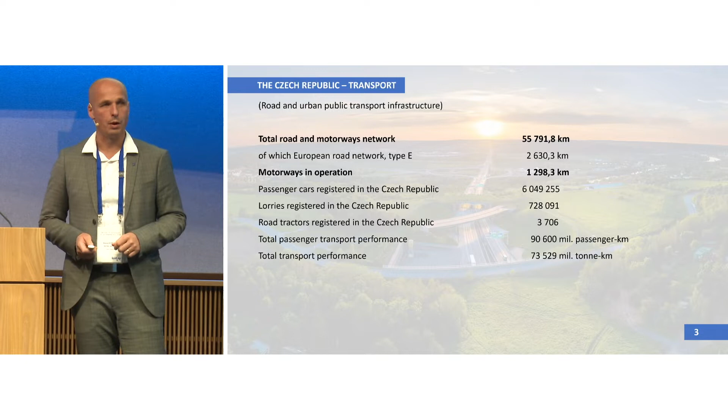So at the beginning, some basic data. We are a small country in the heart of Europe with a population of about 10.5 million inhabitants, and currently we hold the presidency of the Council of the European Union. Something about transport: there are about 56,000 kilometers of roads and motorways, and about 1.3 thousand kilometers of motorways in operation. Prague, the capital of the Czech Republic, has about 1.3 million inhabitants, and it's a famous historical city - I'm sure some of you have visited it in the past.

Something about transport: there are 4,000 kilometers of roads, 32 bridges over the river, and 11 tunnels. What is very important is the division of transport work, where about 37% is made up by public transport. It is very, very important.

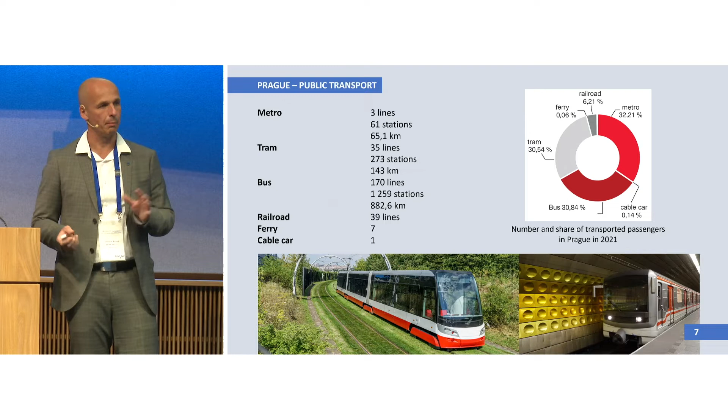Here we can see short information about transport. We have 3 metro lines, 35 tram lines, and 170 bus lines. On the right, we can see the division of transported passengers in Prague last year, and you can see that metro, tram, and bus each have approximately one third. So this is just basic information about public transport.

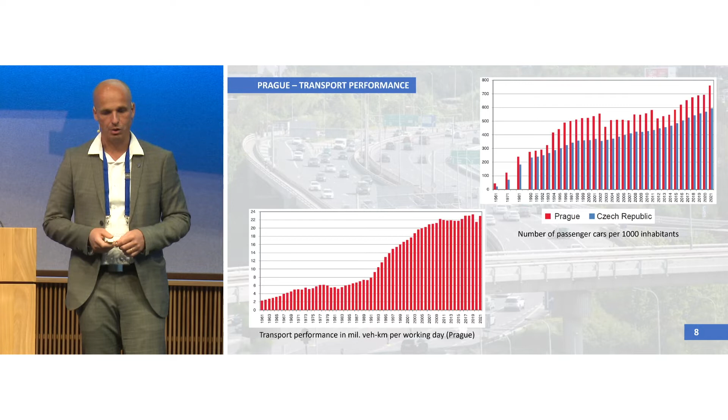On the left, we can see transport performance in million vehicle kilometers. This graph is interesting, especially because you can see the change or growth in 1989 when the political system changed, and you can see the growth of transport performance after that. On the right, you can see the number of passenger car owners per 1,000 inhabitants - as you can see, almost everybody owns a car on average.

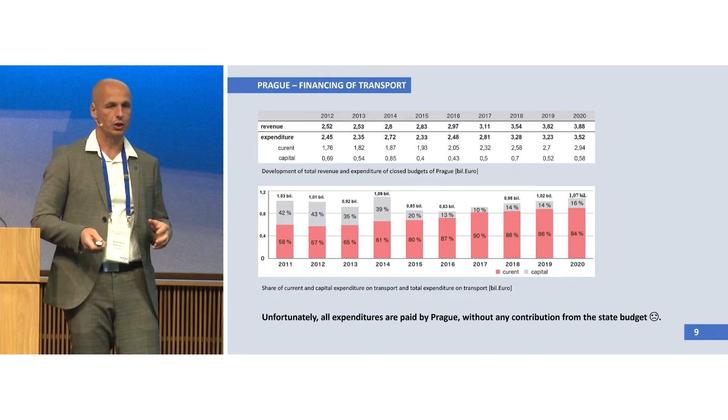Here is short information about financing of transport. First, we can see revenues and expenditures for Prague during recent years, which are something less than 4 billion euro. The table below shows expenditures on transport, about 1 billion euro per year. What is very bad is that unfortunately all expenditures are paid by Prague without any contribution from the state budget. It's really bad. All politicians are talking about it, and I hope it will change, because 1 billion euro is too much money.

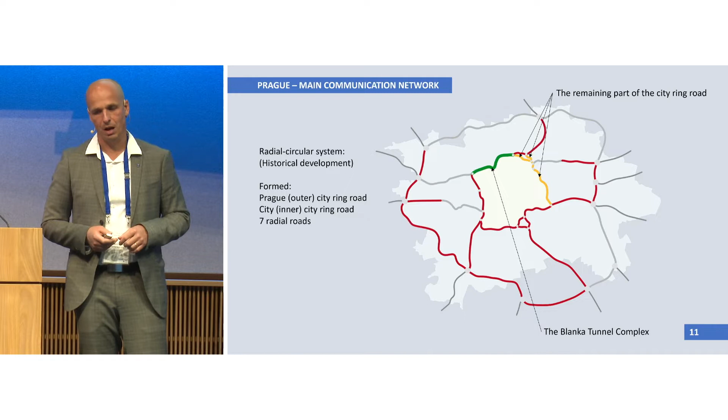Now about the main communication network. It is formed by 2 rings, inner and outer, and 7 radial roads. Red color represents parts which are in operation now. I would like to talk about the following 2 constructions: the Blanka Tunnel complex and the remaining part of the city ring road.

The Blanka Tunnel complex has a total length of about 12.6 kilometers, and it contains about 11 kilometers of tunnels within the town - about 87% of the total length. It was constructed from 2007 to 2015, and the total cost was 1.7 billion euro.

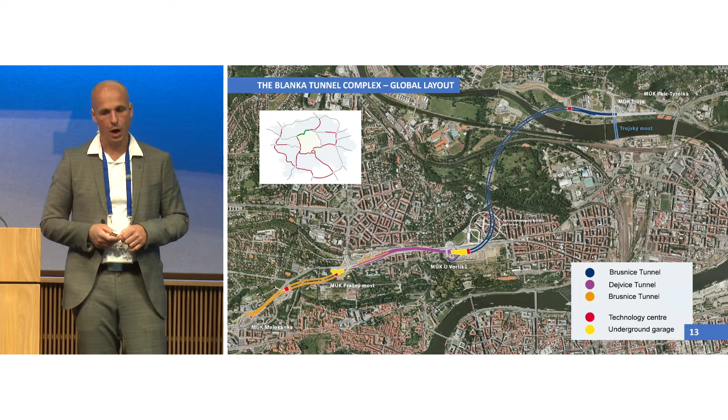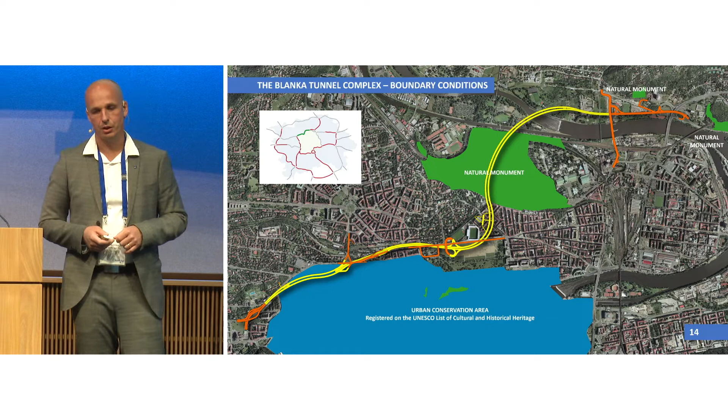This project serves 100,000 vehicles per day. The whole project is divided into 3 tunnels, and contains 4 technological centers and 2 underground garages. It underpasses an urban conservation area registered on the UNESCO list, a natural monument, and the Vltava river.

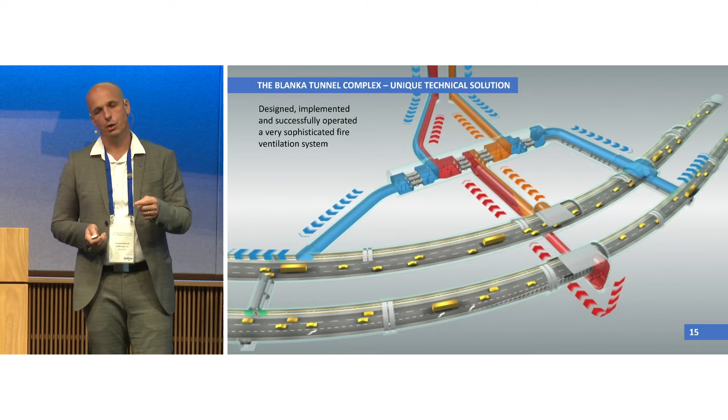It means that in case of fire, the smoke is sucked into the corridor, to the ventilation room, and outside of the tunnel. In this video, you can see very clearly how it works, because this is the smoke detection test.

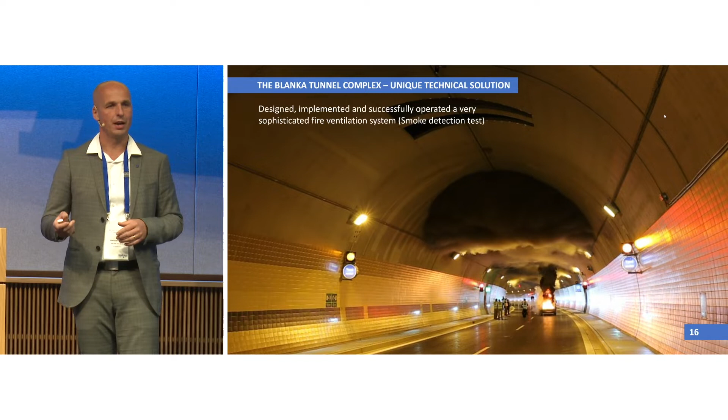It's most useful to try it out exactly like this. Now you can see how the ventilation is working, how the opening is able to suck the smoke out, allowing people to escape in case of fire and so on. So it's very, very useful.

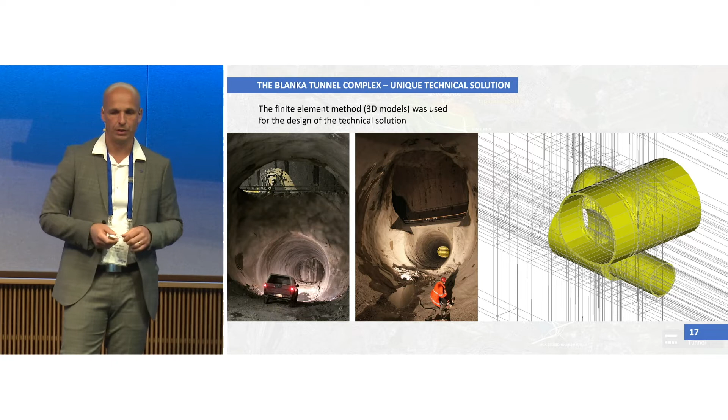Of course, it is a very complicated construction. Some parts are very complicated geometrically, and it was necessary to use the finite element method in 3D models for this project. The excavated ventilation machinery room is one of the largest underground works in the Czech Republic. It has 20 meters in diameter and about 300 square meters cross section. Compare the picture on the right to a building which has about 5 floors.

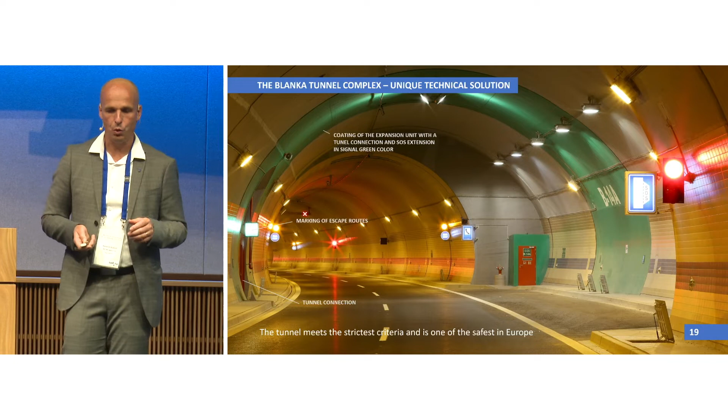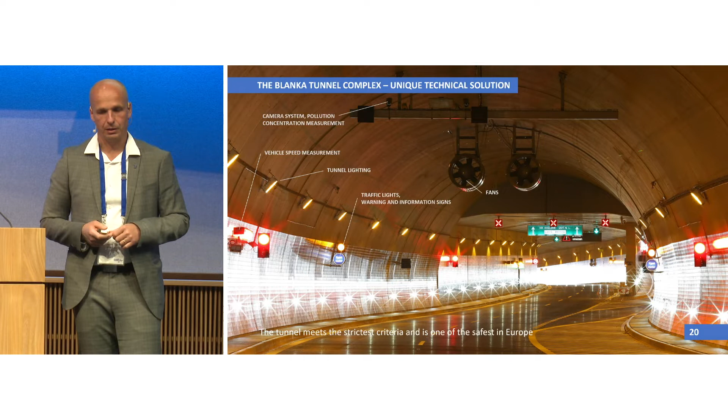The Blanka tunnel is really well equipped, as we can see from the safety point of view, according to the standards. It's not necessary to explain everything, but from a technological point of view, it contains tunnel lighting, camera system. This system allows automatic detection of smoke, slow cars, passengers or people on the road, and so on, and of course pollution concentration measurement. Vehicle speed measurement is really necessary, because keeping maximum speed is necessary in the tunnel. Fans, warning and information signs, emergency lighting of pavements, variable information boards and road markings, and linear fire detection.

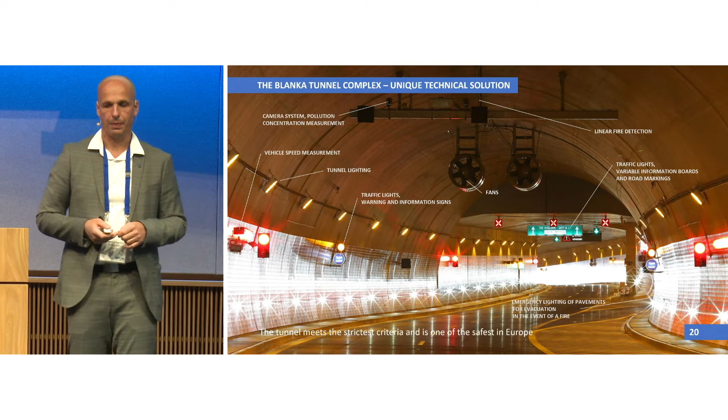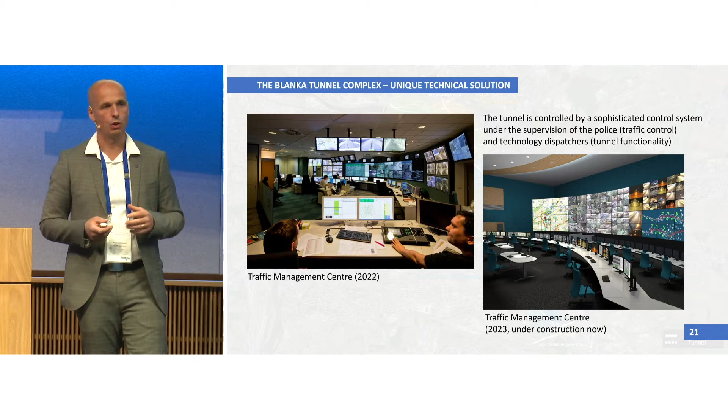This tunnel is controlled by a sophisticated control system under the supervision of police and a technology dispatcher. In the picture we can see the traffic management center as it looks now, and here we can see the new one, which is under construction now and will be put into operation in 2023. I think this is the first similarity to underground repository construction, which is fully equipped with technology and controlled by a sophisticated control system.

It's very complicated to build a construction in an urban area. The construction is a short-time nuisance for local people living around it. For this reason, a special information center, a visitor center, and a special website were established. I think this is the second similarity, and it is necessary to very intensively communicate about the construction to the people. In my opinion it's very important, and for this reason this information center and website were established.

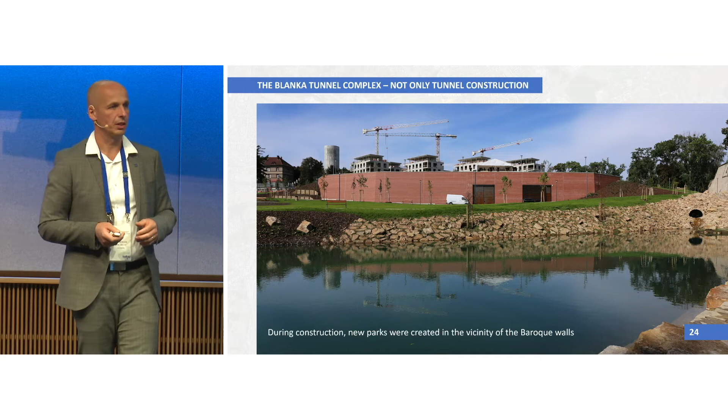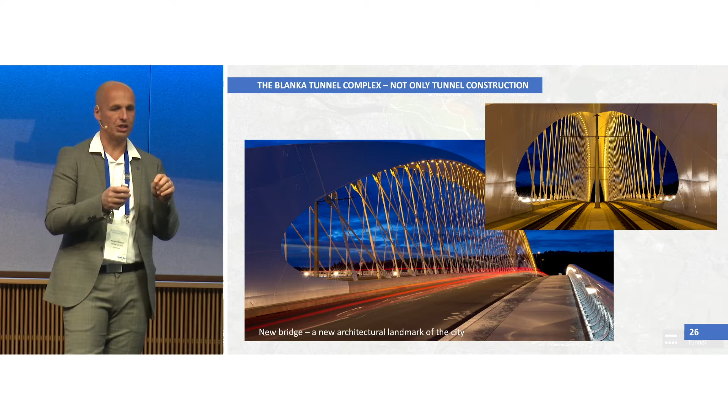The Blanka tunnel is not only a tunnel for vehicles, it's a new park, new tram stops, reconstruction of tramways, and a new bridge, which in my opinion is a new architectural landmark of the city, especially at night, as you can see in these pictures. This is another similarity, because the construction is not just about this project, but about benefits for the people who live around it and are interested in it. So it's necessary to create benefits, not only focus on, for example in this case, a road for vehicles.

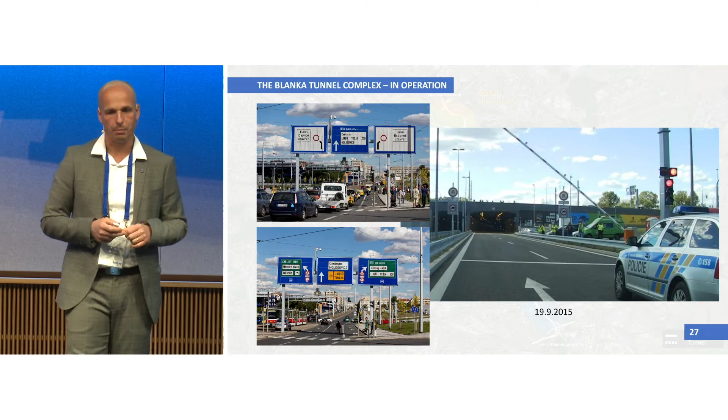Yesterday it was 7 years since the tunnel was put into operation, and in my opinion it was a really big day for people living in Prague.

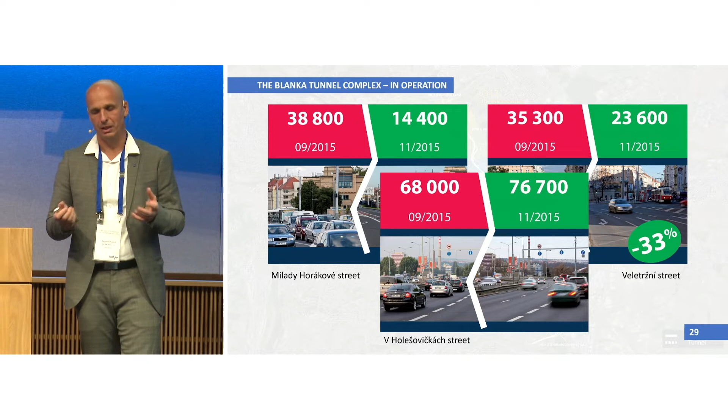What impacts did we have? It's completely clear in this picture, because it is the same street before the tunnel and after the tunnel. It means we rapidly decreased the amount of cars on the surface. And of course not everywhere - there are some places where it is not so good, especially at the end of the Blanka tunnel complex, where the remaining part of the city ring is missing. So it is a complication, but we are trying to do it as well as possible.

We very carefully monitor traffic and environmental impacts of the project, and publish details on the website, in the metro, and on billboards. This is again similar to the underground repository case. It's necessary to create positive public perception, which is very important in our case for the further continuation of construction of the City Ring Road. It's necessary to give positive information from the existing project to the people, to inform them about it, because it's easier to plan and discuss new construction that way.

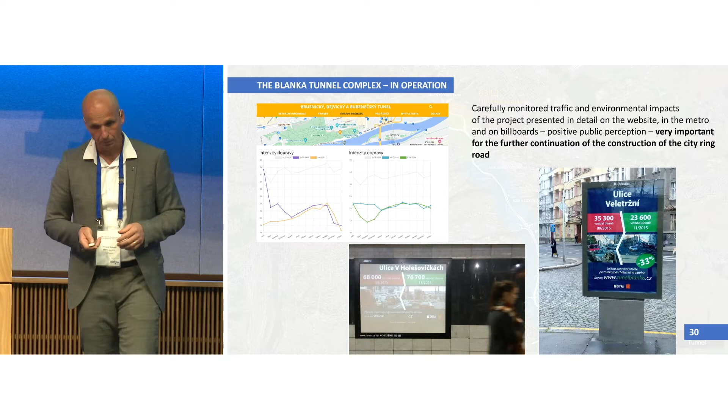I think this is another similarity. Just a few sentences about the cost. As I mentioned, the total cost was 1.7 billion euros, about 30% higher than expected at the beginning. What were the reasons?

First, it was unexpected geological conditions, about 17% of the 30%. It's the same as in the underground repository case, but not exactly, because here the tunnel underpasses really bad and complicated geological conditions, while for the underground repository we designed for the best rock conditions possible. So the problem could be there as well. About 5 or 7 percent, I don't know exactly, was due to new client requirements.

After the contract, the client decided to do a larger scale of reconstruction of roads, parks, and so on, which of course increased the price. The other reasons were adjustments or new technical standards which the client decided to use. As I mentioned, the construction started in 2007 and finished in 2015.

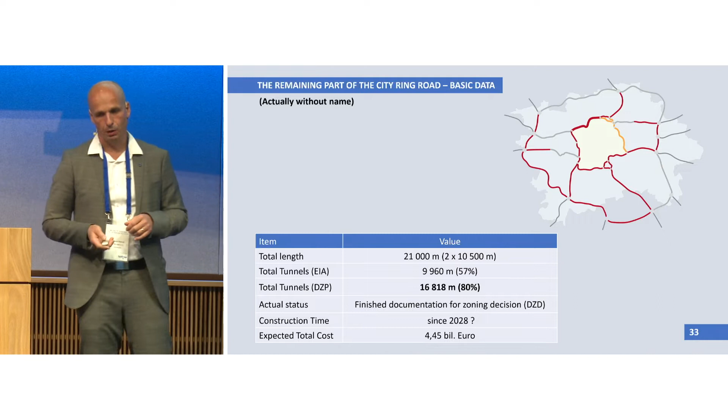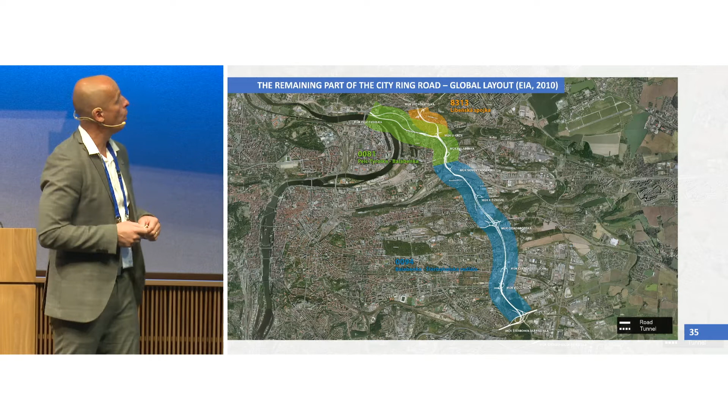Now I would like to talk about societally acceptable urban design and minimization of environmental impacts. Here we can see the global layout from EIA documentation, where the dotted line represents tunnels and the full line represents above ground roads. The other global layout is a little different, from documentation for the zoning decision. With the yellow color you can see tunnels, so it is 80% - almost entirely in tunnels except for this part at the end, where there are no buildings located, and there an above ground road is designed.

Now we will see some visual comparisons between how it looks now, how it was designed in EIA documentation in 2010, and what is the final technical solution in documentation for the zoning decision.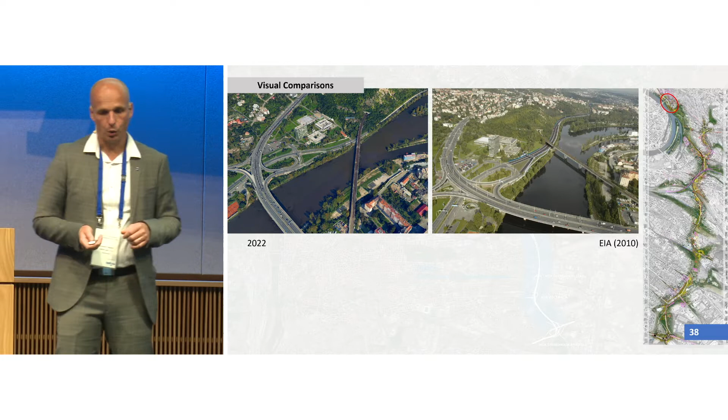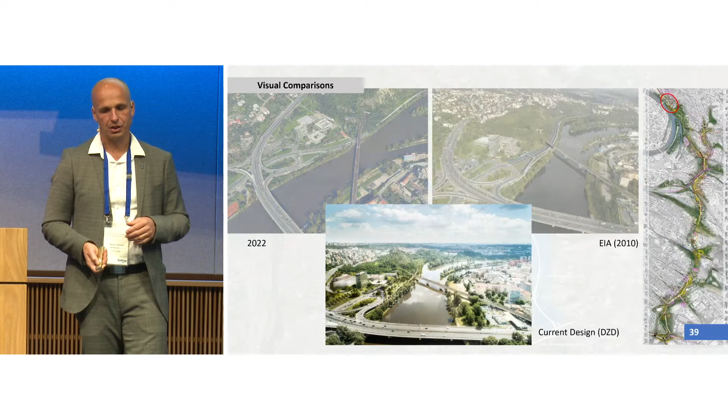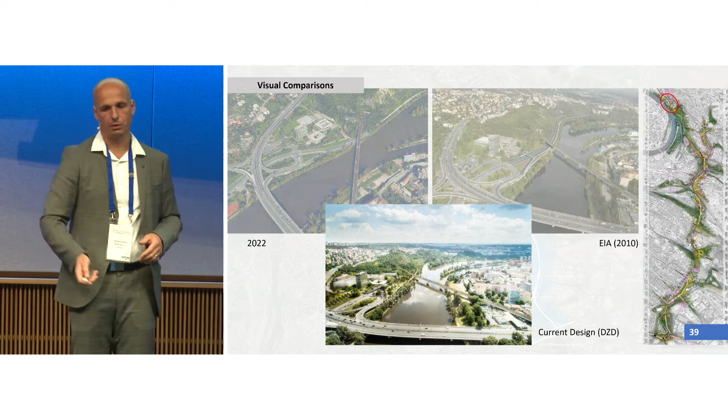In this case you can see how it looks now, and this technical solution of the city circle - an above ground road which follows the river here. In actuality it has been completely changed - you can see the portal of the tunnel, and the city ring road is underground for the whole length here, while this road on the surface is the same as the existing road, just for pedestrians, cyclists, and so on. It's very nice to walk around the river. I forgot to say that on the right you can see the place where the visualization is located.

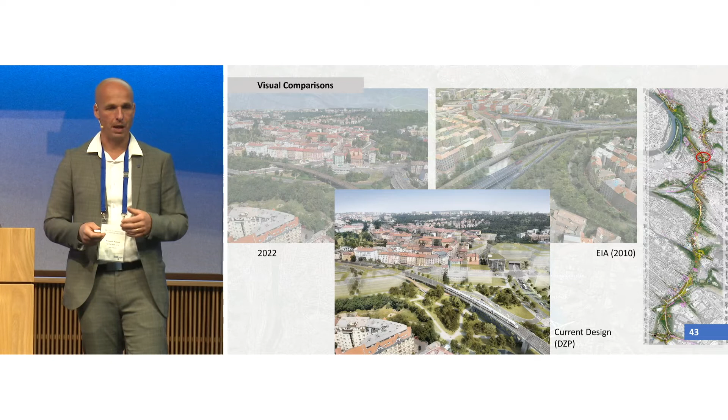Another example, again how it looks now in 2022, and what was the solution from EIA - you can see again the city circle as an above ground road between buildings. The new solution now is here: there is a city ring road, but underground, with nothing above ground, just tunnels, which will allow, for example, building up this area with new buildings, or planting new trees and greenery generally.

Another example from the other side, again how it looks now, and what was the solution of EIA - you can see again the city ring road as an above ground road here. The technical design from DZD shows the city ring road as a tunnel, and here we can see just roads for local transport with low intensity of traffic.

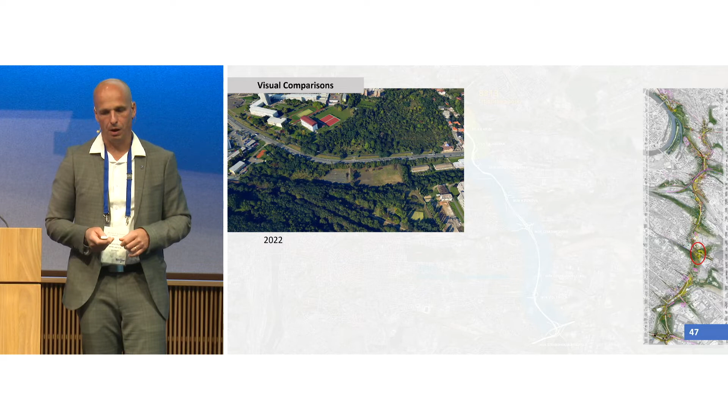Next visualization is from this part of the project. Again, how it looks now, the previous technical solution from EIA, and the new technical design from DZD. As you can see, there are fewer roads on the surface and more greenery.

The last example of visual comparisons is from the end of the project. You can see there are not so many changes here because this area is not full of buildings, and generally there are no new buildings planned here, so this part remains above ground.

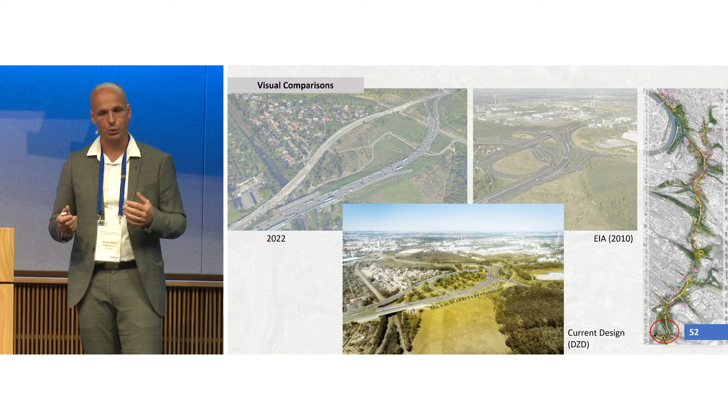From these previous slides, I would like to show you that it's necessary to design construction very carefully to minimize environmental impacts, and again to try to put construction under the surface. It is the same, in my opinion, as with an underground repository - it's clear the repository itself is underground, but the part at the surface is like a factory. It's necessary to think about it, offer some benefits, and try, in my opinion, to hide it underground as much as possible.

It's the risk of accident, and it's necessary to minimize it. So it is very, very useful to use a GPS signal.

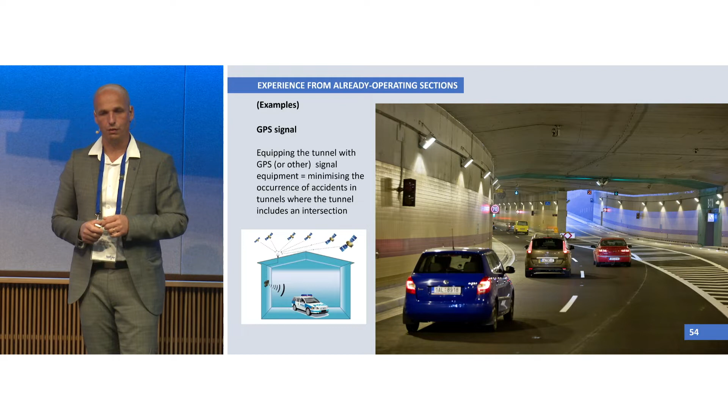Again, I have to say that I am talking about tunnels with intersections. A tunnel from A to B without any crossings and possibility to get out is quite a different case.

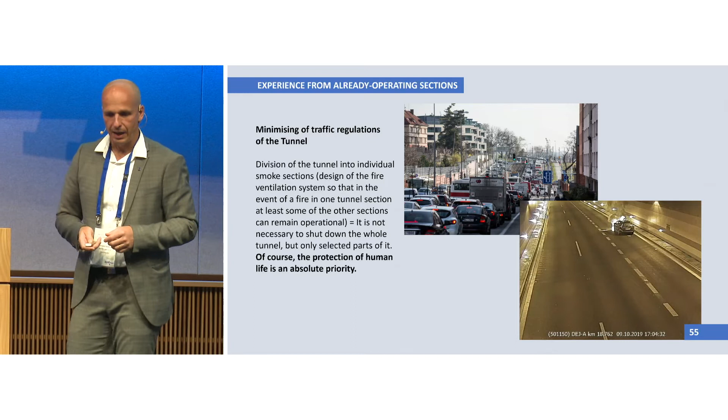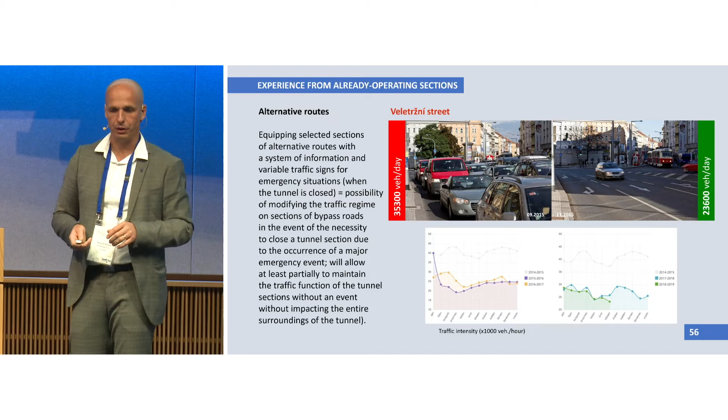Another example that I think is important: it's necessary to think about alternative roads. This is connected to my previous slide. If I open the tunnel and rapidly decrease the amount of cars on the surface, I can change it. I can plant new trees, make new parks or cycle lanes, and completely change it, because there is a really small amount of traffic. But in a case of fire or an accident, when I have to close the tunnel...

All cars have to use the surface road. But in this case, the previous or former road on the surface is missing, so it is terrible. And the solution is, for example, to use or create bus lanes and to use variable road signs.

When the tunnel is operated, the lane is just for buses. Then in the moment when I need to close the tunnel, I can change the road sign, and the lane becomes able to be used by all cars. So it's necessary to think about it.

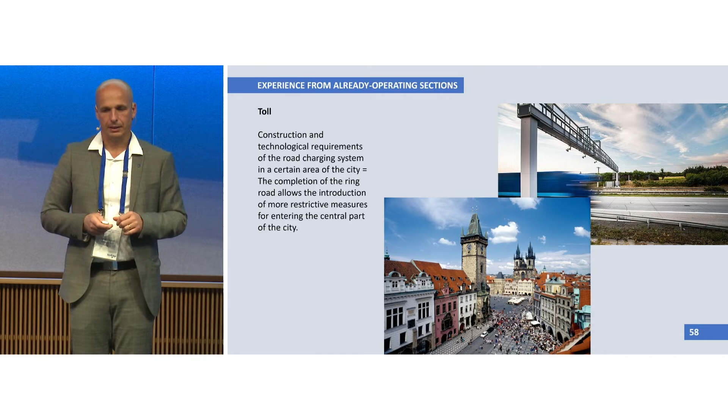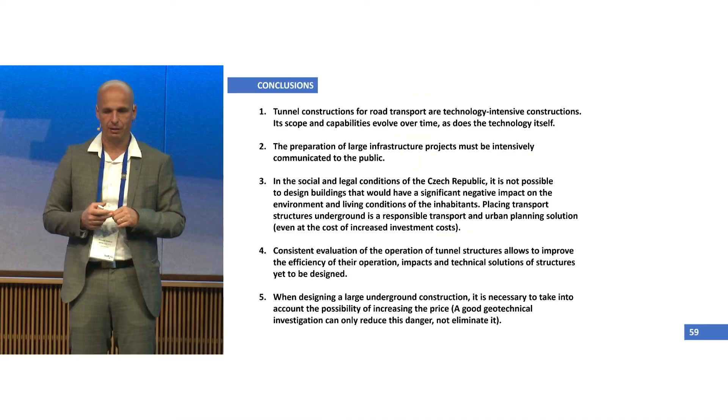Now we are at the end of my presentation. I will not read it exactly, but I think I found some intersections where you can have some shared problems, like in underground repository. Some of them are that it's necessary to communicate, to be aware of money, and to look for the right system of contract, which is very, very important. That's all, thank you for your attention.

The outline of the presentation has 4 parts. I'm going to describe the context, then describe the approach to optimization on decommissioning end states. Then I'm going to provide a worked example at Traws - we shorten it because the pronunciation is difficult, we generally just say Traws when talking about it. Finally, I'll give some conclusions and try to summarize the relevance to geological disposal optimization.

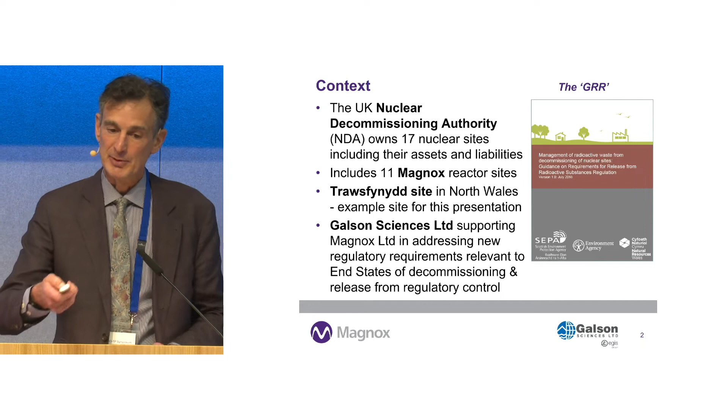And what's the rationale for this? Well, basically it comes from a consideration of the detriments associated with off-site disposal, off-site transport and disposal.

When you think about it, there are safety issues, both increased detriments to worker safety, both radiological and non-radiological. There's large environmental nuisances, a larger carbon footprint. There's cost, both of the decommissioning operations, but also the off-site disposal costs.

And certainly in the UK, and probably not only in the UK, engineered disposal at national sites is a scarce resource and needs to be properly managed. If we can find other solutions, then it behooves us to think about them. So there's a range of detriments that need to be thought about, and long-term radiological safety is not the only issue in this decision, but of course it is an important issue.

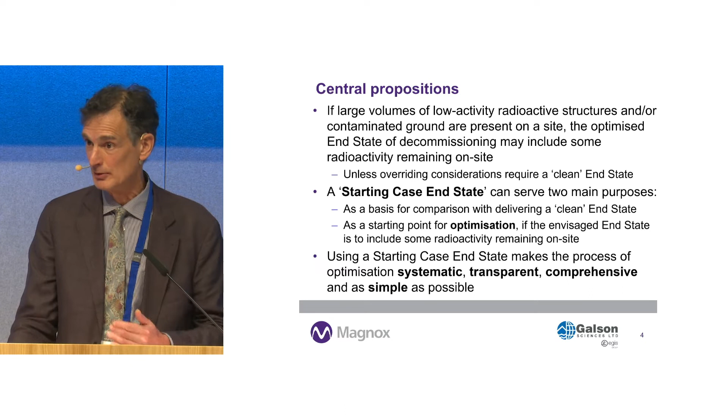So those are positive. Those are the attributes we're looking for as a starting point.

The way this has been defined by MAGNOX is, first of all, what can we do to minimize off-site transport of materials? And by minimizing that, what they're actually looking at is minimizing the quantity, not the activity, because clearly all of the higher activity materials will need to be taken off-site. So this is very much focused on low activity, high volume wastes.

And what might the credible candidates be for leaving structures or materials on site at the final end state of a decommissioning program?

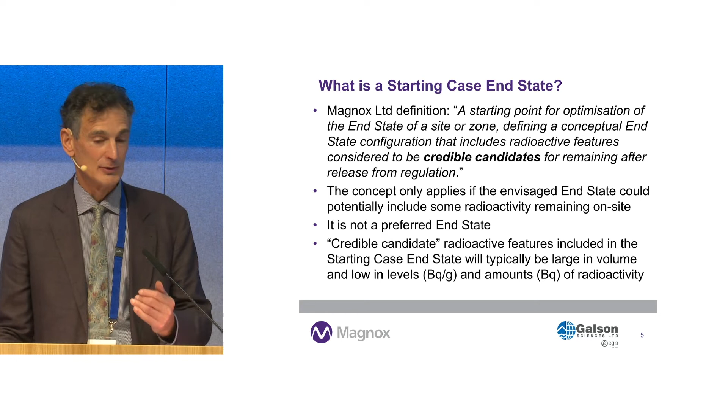So the starting case end state is, of course, not the preferred end state. It's only a starting point for optimization discussions. So that's an important aspect.

And along with that is the concept of iteration. It won't be a one-pass process. It will be repeated as the program advances, and this is foreseen in the regulatory guidance as well, because there are actually two requirements pertaining to optimization in it.

First of all, there's the decision of whether or not it even makes sense, whether it's an optimized solution to leave any material on site at the final end state. Certainly radiological assessments are part of that decision. They will inform the decision, but they're not likely to be the determining factor because of the other issues I mentioned, the other detriments associated with off-site solutions.

So that's one thing. And the approach to doing this is to come up with an end state that essentially has no mitigations in it, and then to examine potential ways to improve that end state through mitigation.

This is the second part of the staged or graded approach in the regulation, that once you've reached a decision that yes, some material could be left in principle on site, the next step is, what's the best way to do it? How do we optimize that solution?

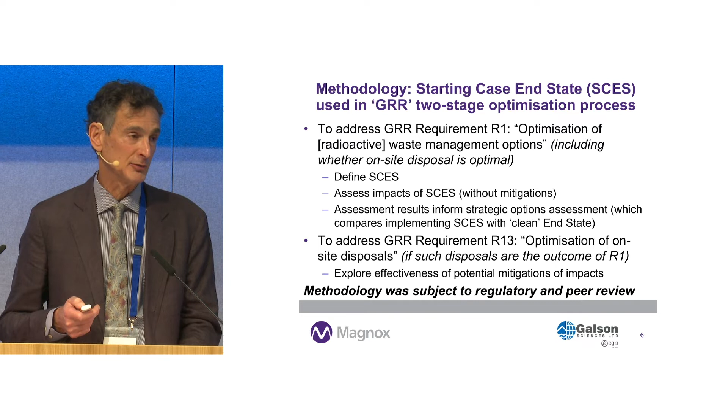So I would call this a graded approach to optimization, whereby you make a decision first on the higher level question. You define that as simply as you can, and then you might have a lot more detail that comes into the lower level decisions, and they might need a lot less stakeholder input as well at that point, once the primary decision is made.

This methodology was subject to dialogue with regulators and also peer reviewers.

And it's kind of well internalized and being rolled out now across Magnox sites. The site that is at the front end of this, and I'm going to talk about this now, is the Trawsfynydd site in Wales. The site had up until now been the lead site for applying this approach, because it's in a national park, so it's in a scenically important area. It was one of the sites that's been prioritized.

The original option, as for other sites, was to have an end state around 2080 with no remaining radioactivity on site, so a clean end state. Now the approach being implemented is to look at the high volume, low activity features that might be left behind, and the structures that are most important to think about.

The typical structures are reactor bioshields and cooling pond structures. These cooling ponds are essentially where spent fuel was cooled prior to sending off to the Sellafield site for reprocessing. And indeed, on this site and other sites, there are areas of contaminated land that need to be considered.

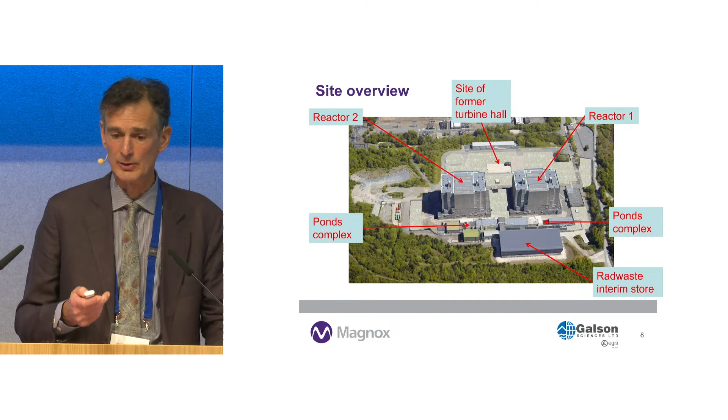This is broadly, I'm sorry for not having a better picture, John, but this is broadly what the site looks like today. There are two reactor blocks, and you can see the ponds complex in front of them. It has a pretty large extent actually, it's a large structure in its own right. The turbine hall is now long ago demolished, and there's an interim store on the site for intermediate level waste. The spent fuel's all gone at this point because the reactor shut down quite a long time ago.

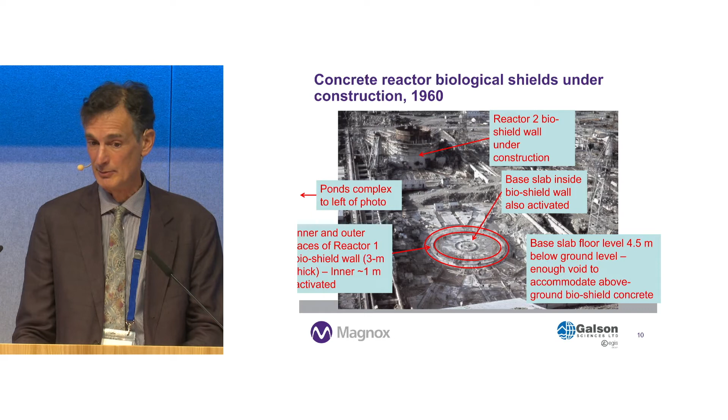So in order to define the starting case end state in terms of inventory at Trawsfynydd, first of all, obviously a number of kinds of wastes could immediately be excluded. The reactor core graphite is still on the site, that doesn't fall within the scope of this study, that has to be disposed of in another way. There's also some non-radiological hazardous components, asbestos in particular, quite large quantities that wouldn't be candidates, and readily removable metallic components wouldn't be candidates.

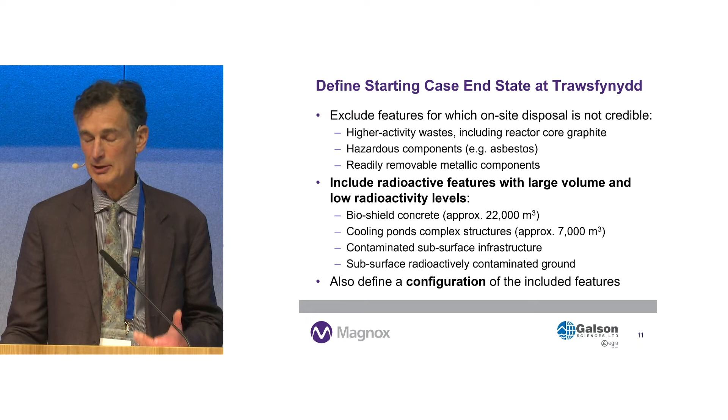So the focus very much is on the large volume, low activity structures and the contaminated subsurface ground. So the one thing is to define the actual structures under consideration, and the second thing is to define a geometry that needs to be thought about.

And so the first assessment is just looking at it like that. The above ground material is collapsed into the void space, and there's 1 meter of clean cover, and that's it. So if that's the first test, is that good enough just to leave it like that?

So the starting point is an end state defined like that, with no substantial mitigations. And that is used for two purposes: first, to inform the strategic decision already made, in fact a couple of years ago, about whether or not any radioactivity should be left on site.

And to provide a base case for comparison with variant end states that might incorporate one or more feasible mitigation measures. The radiological performance measures used for these assessments were essentially long-term performance assessments considering human intrusion and groundwater pathways, using a risk-based performance measure in the guidance for groundwater assessments, and a dose-based measure for human intrusion.

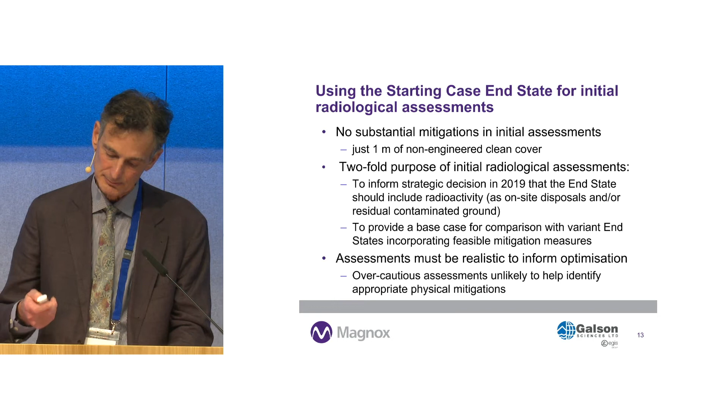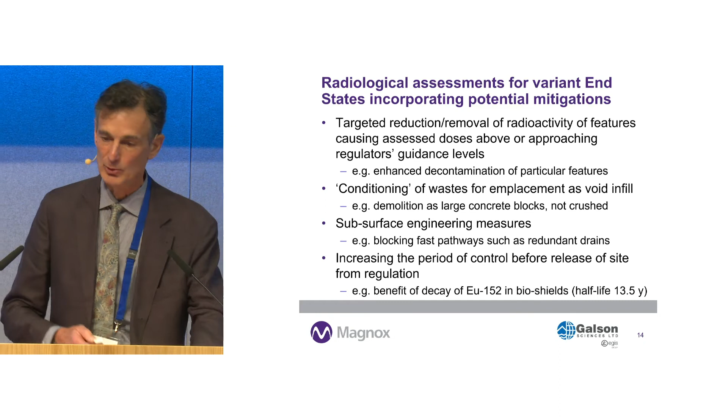And what I want to do is make some summary statements now. First of all, I would stress that the features of a starting case end state for optimization were major decisions being made to completely change the final end state of reactor sites.

The requirement was to have a methodology, a tool, to bring stakeholders along with this major change. The features described here were basically a system that could be rolled out across all Magnox sites in a systematic way, consistent with the guidance, with clear criteria on how to use it, and comprehensive in allowing consideration of a wide range of potential mitigations, while finally avoiding overly complex options, at least for the initial site-wide assessment.

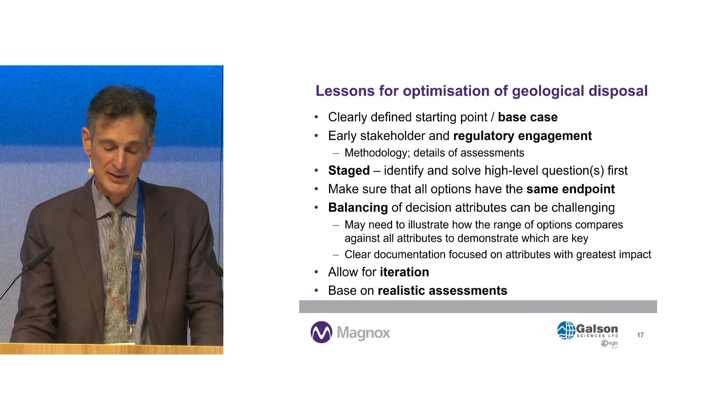The balancing of decision attributes was challenging. It can be challenging, and one lesson is that you need to focus on those attributes which make the greatest impact on the decision. To get there and achieve stakeholder buy-in, you need to show that you've considered all potential attributes and made the argument that some are less important, some are more important, to the decision.

Finally, there needs to be time allowed for iteration. We need to consider that a lot of disposal safety cases are based on conservative approaches in order to get approval to go ahead at a site. From the point of view of optimization and improving the design, those assessments need to be based on a much greater level of realism to ensure that we don't end up with non-optimal outcomes. So thank you very much for listening.

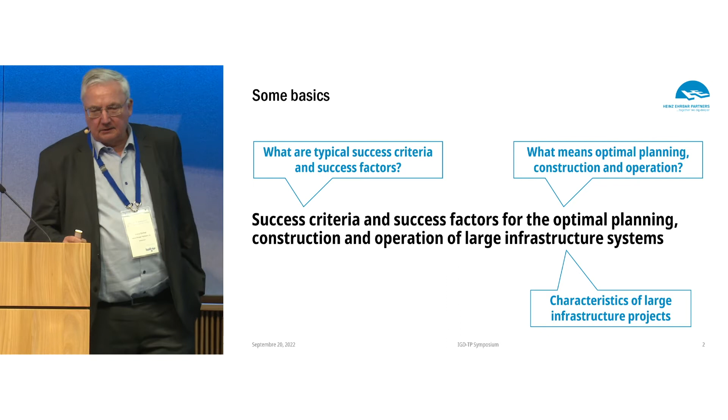Many of them we have already heard. But then what means optimal planning, construction, and operation, and what are the typical success criteria and success factors? And I would like to start with characteristics of major infrastructure projects.

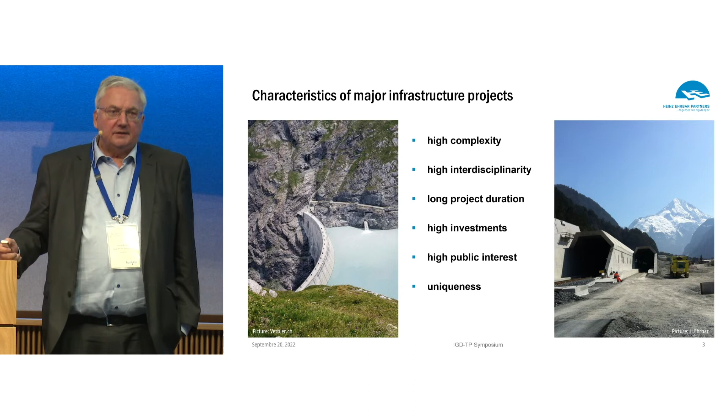And as we also have heard, we have normally very long project duration, which makes it very difficult to manage these projects. I think the long duration is one of the main aspects of such projects. Then high investments, we have also heard, high public interest, and very often you have a certain level of uniqueness in those projects, and this leads often to innovative solutions.

So the success factors for the project are the root causes for a sustainable, really sustainable success of the project. If we take here as an example a project - I want to go to this mountain - then I need success factors that I can reach this top of the mountain. I need the right clothes, I need equipment, I need food and everything. And I have also to think what happens if the weather becomes bad or different than what I expected.

So a project starts with the idea and with listing, or with creating a list of the requirements, and the goal is that the requirements are finally fulfilled. These are the success criteria. And as we all know, on the way to the top, we have a lot of processes to fulfill, and these processes are subject to threats or chances or risks.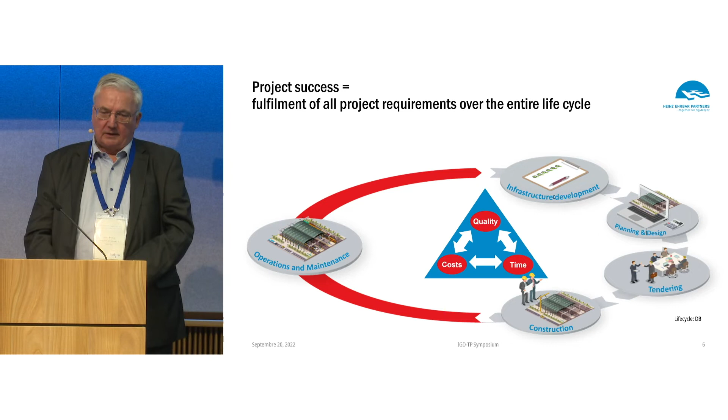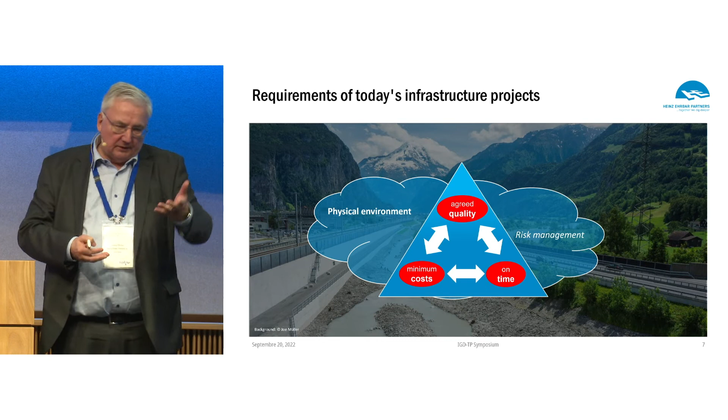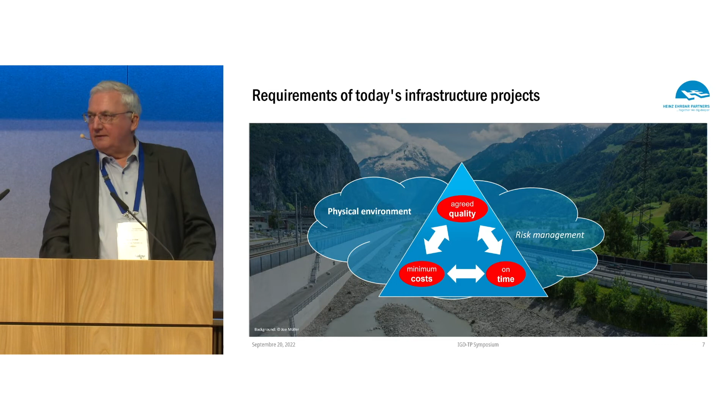But it's more complex because our projects are embedded in a physical environment here in the mountains. If you have to cross the Alps with a long tunnel, the longest tunnel in the world, you have ground risks, and you don't know at the beginning what's happening. So one has to be aware that our projects are in an environment which is not 100% stable. This is the physical environment, but also the social environment. There we know that changes can be even quicker, depending also on political systems. We have to be aware with our projects how we deal with all these requirements from this environment.

Opposite to the project in Prague, as an example, this requirement for the Alp Transit project, for the Gotthard Base Tunnel, led us to the reuse of the excavated material. The longest tunnel of the world has no cubic meter of alluvial gravel. Everything is reused excavated material. And these, I think, are the things which one has to define as early as possible in a project. Otherwise, if you are negotiating with a contractor, it's too late.

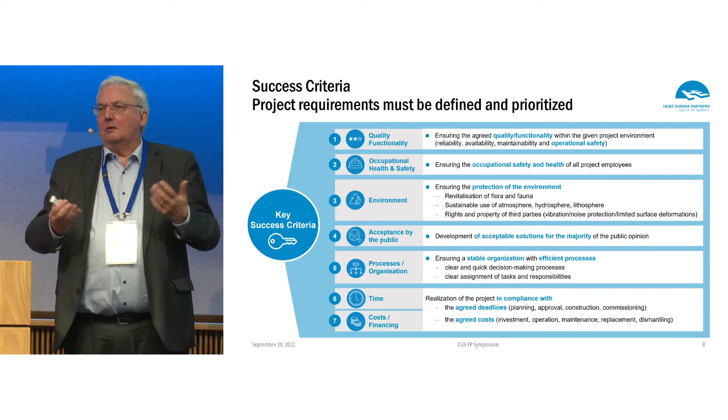Then acceptance by the public is very important. Processes, organization, time, and costs are for me at the end, because costs and financing is the result of all the other requirements we have to fulfill. Very often, if you are discussing with political instances, then it's only cost, always costs. But we should discuss all the other requirements before we discuss the costs. That's my opinion, and also the experience of it.

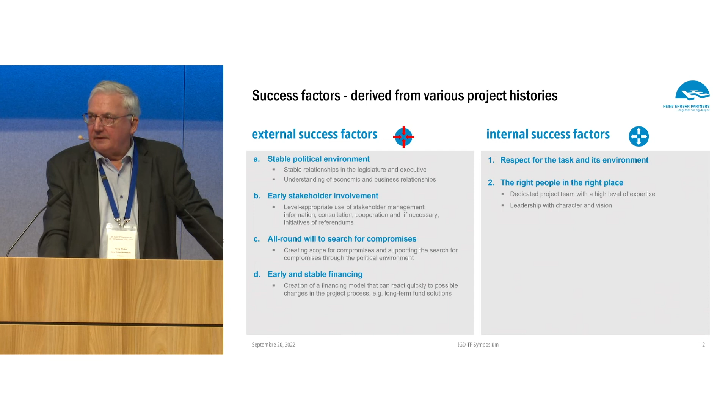So therefore, this is for me number one. And then, we also don't speak too often about this, but I think it's very important that you have the right people in the right place at the right time. Otherwise it becomes difficult. And then you need a culture where these people are able to work together. You can have the best people, but if they are not able to work together, you will have no success.

This is also very important, and I can show you we have made very good experiences also with certain simple values, but they help to have success finally. But with the first three points, you haven't constructed anything. So I think it's also very important that you finally have a careful project preparation and then the execution. All this together you need at minimum.

Let's have a look at the first success factor, the stable political environment. We are happy here in Switzerland that we have this direct democracy and we can measure whether we have success with the population. We have three different types of public votes: the mandatory referendum, optional referendum, and the federal popular initiative. And all these tools of our democracy were involved in the project.

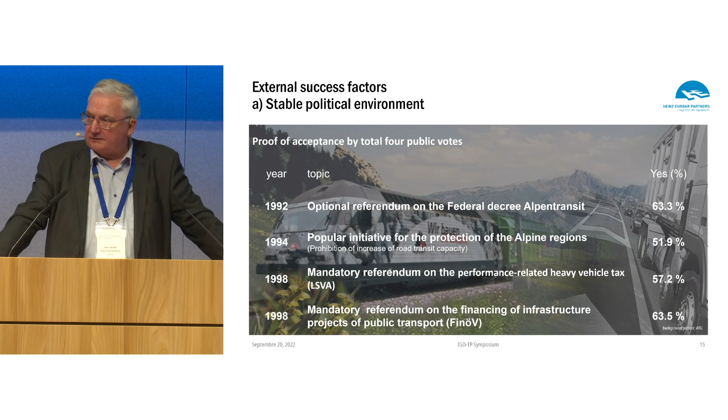And then, I will show you, this financing became difficult, and one could solve it only with a new tax system and a new funding system. And also this was part of mandatory referendums, and this was also accepted.

Now the stakeholder involvement. In the 1960s, the topic of this project was to connect the northern part of Switzerland, the German-speaking part, with the Italian-speaking part of Switzerland, and we have a federal organization. The cantons were involved in the decision-making process and in the optimization of the projects. Finally, the Gotthard Road Tunnel was constructed.

After opening of the Gotthard Road Tunnel, one saw that the railway infrastructure had to be improved because it was not competitive anymore against the road, and it created problems. But at that time, it was clear that the construction of a railway line through the Alps is no longer a national task. It is the integration of Switzerland into the new European high-speed network, and it's a task on the European level. And therefore, the conference of the deputy traffic ministers was created from Germany, Austria, Italy, and Switzerland, and they made the recommendation that one axis has to be created through Austria and the other one through Switzerland.

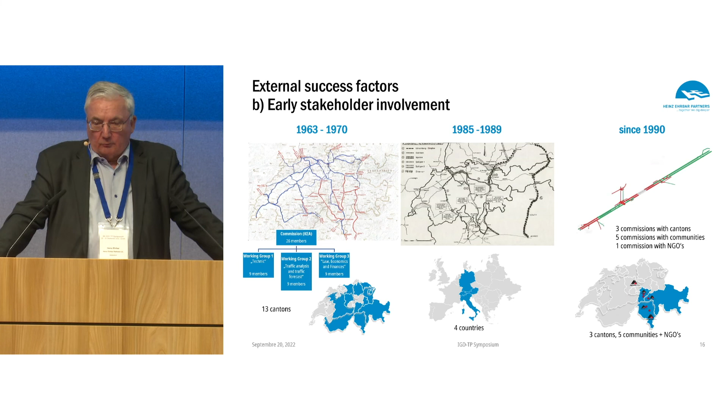The decision was taken, and since 1990 the construction was in progress, and then the people were affected in Switzerland. Then it was very important that we had excellent relations with the cantons, with the affected communities, but also with the environmental organizations. And this worked very well and gave huge support to the project.

And this process to find a solution took 8 years. One has to be aware, if we say we want to find compromises, finding compromises needs time, and this has to be considered in our schedules.

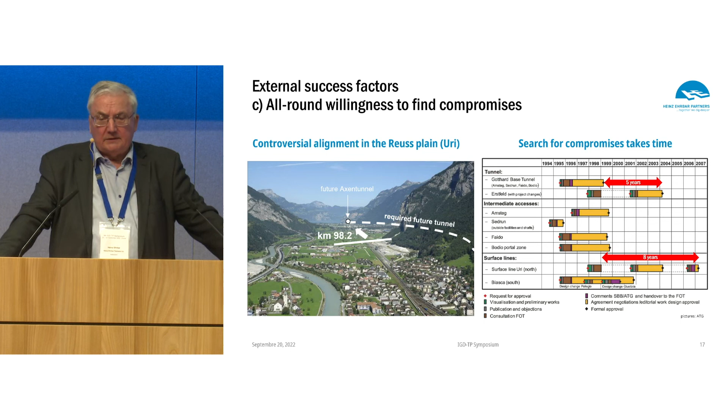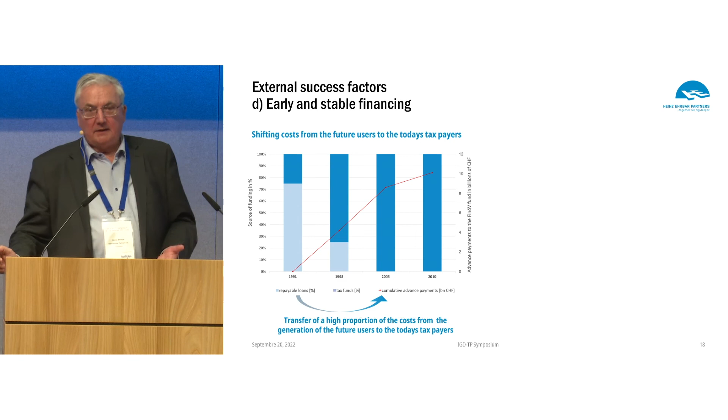Then the stable financing. At the beginning, the first public vote was that the future generations, who have the main use of this infrastructure, should pay 75% through repayable loans, and only 25% from public funding. One saw this would not function, especially after the experiences with the Eurotunnel, and the system had to be switched completely. Now everything was paid by new taxes, and as I showed you, it was part of these public votes.

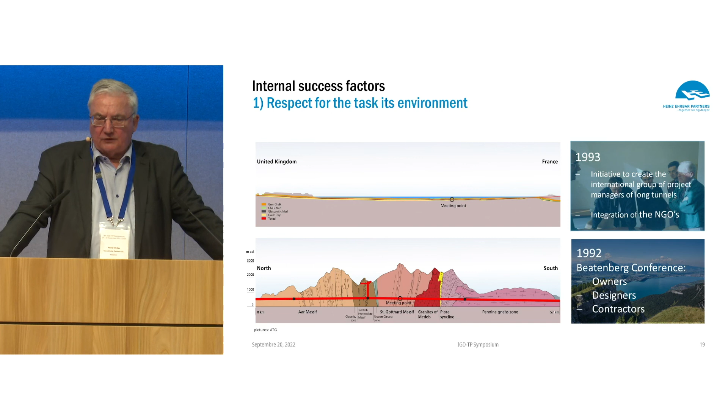Then respect for the task on its own environment. One was talking to other projects. Eurotunnel created exchange of experiences as you have here, and I think it's very important that you have such platforms where you can exchange experiences. But one said also, before the first public vote, what do we have to do so that this project doesn't become a disaster? The owners, designers, and contractors sat together and created new elements in the contracts so that we wouldn't have big problems. And finally, we have to say it was successful. We had no court case with a major contractor.

The right people on the right place. Character, willingness, skills were the topics we were asking for, and we were very lucky that we had 80% of the people in this project from Switzerland and the neighboring countries. This helped also with the language, that everybody understood the other, and I think it was very helpful.

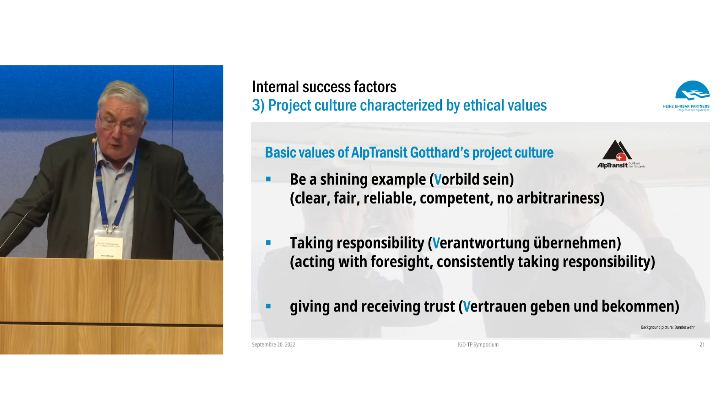And then what I mentioned, the ethical values. We had a very simple 3V culture at Alptransit Gotthard. Be a shining example, Vorbild sein in German, the first V. The second one was taking responsibility, not shifting responsibility always to others — Verantwortung übernehmen. And the third one was giving and receiving trust, Vertrauen geben. I think this is also very important, and we were very successful with this.

Then I think it's very important that we have a clear preparation and execution of the project, and that we think to the end of the project. The topic was to construct a new railway and not to construct the longest tunnel of the world. This became clear only when it started operation — then it was very important. But during the whole process, it was always the new railway line, documented in an operational concept, a maintenance concept, and a safety concept.

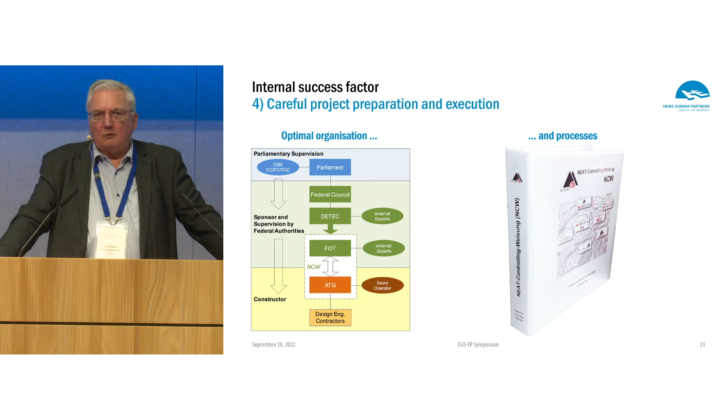These were the basic documents at the earliest beginning. And it was asked in another presentation, how did you manage this? It was very easy in this case. The total investment of Alptransit, including the Lötschberg axis, was 22 billion Swiss francs, and the handbook from the government was this small folder with around 100 pages.

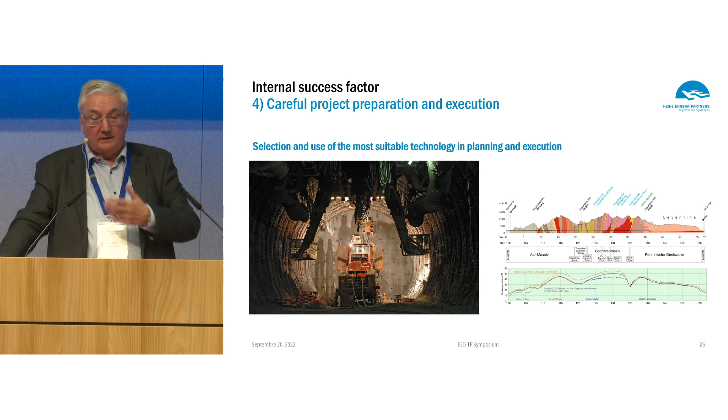So with this, we were very successful. Then very important is also the risk management from the earliest beginning. Simple, but it has to be made on the site, and you need also careful preparation and execution of the projects, which led in our special case also to the development of new materials, because we had such special conditions.

So I will come to the end. Since 2016, the Gotthard Base Tunnel is now under commercial operation. It has a very high availability. The quality, I think, is given.

The annual maintenance and operation costs are 68 million Swiss francs. It's rather high, but when we made the decision and the optimization, the operation costs had a very low percentage in this system, and therefore the cheapest investments were built — not the system with the lowest construction volume, and not necessarily the one which is maybe for the long term the best one. If we look at this, what is our final result in this system, then we achieved it rather well.

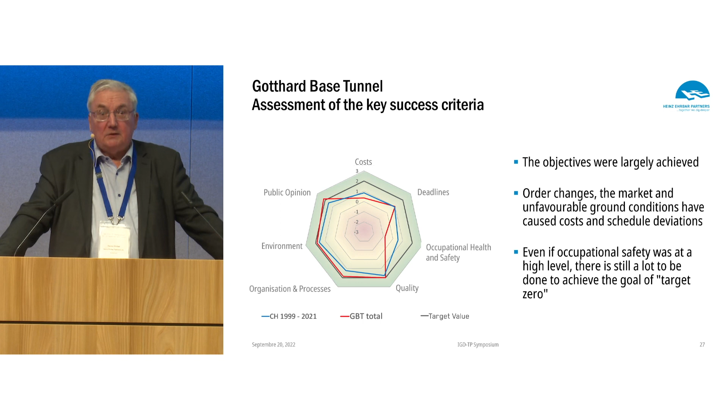Only occupational health and safety — we have a very strong measuring system. We had 9 deadly accidents there. We still have to improve very much in underground construction.

So my final recommendations: avoid to ring up an architect and engineer syndrome, as Michael Latham called it in his famous report. If you start as an owner, you have to define the success criteria and the success factors, and your architects and engineers can help you, but you are responsible. Then define your own key success criteria at the earliest beginning of the project and monitor them, cultivate the key success factors, and implement a professional project risk management at the earliest stage as possible.

With this, I come to the end. Sorry, I was a little long, but thank you for your attention.